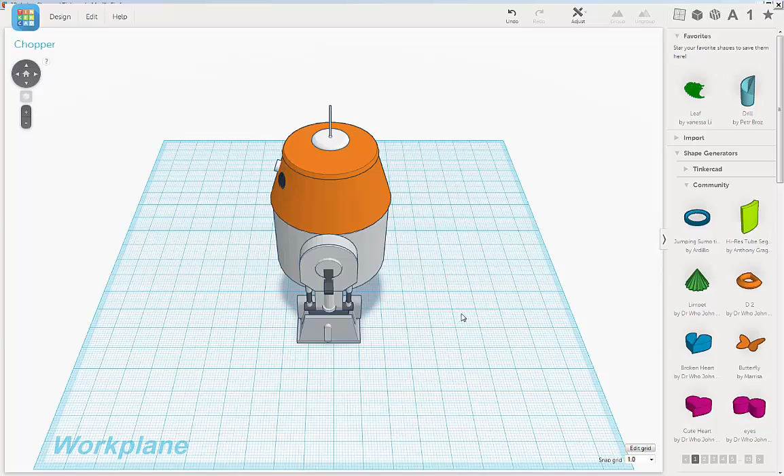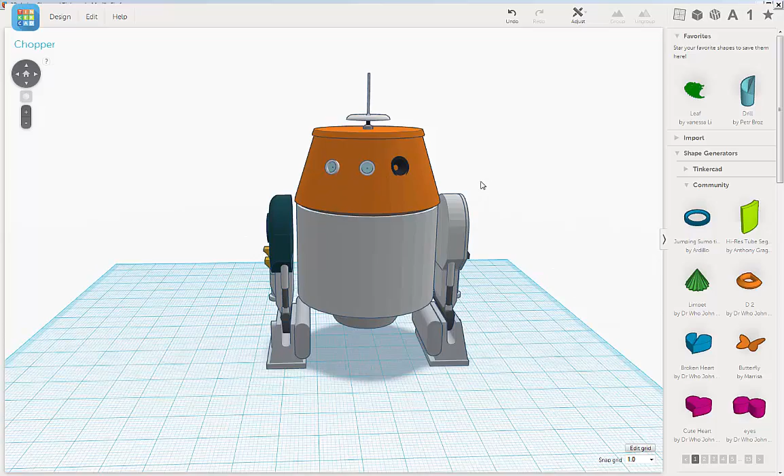Next thing we're going to do is, if you look at your reference material, he has a yellow stripe that runs around the lower part of his head. Since we can't paint colors, I'm going to do a trick to make it look like we painted on it, but we didn't. First we're going to select this top piece here, and since we haven't cut any pieces into it, it still has all these controls, which is very important. That's going to come in very handy.

So now we selected that, you're going to go to Edit, Duplicate, and we're going to slide this down. Right now it's perfectly aligned with this head, so that's very helpful. And we're going to go up to the bottom radius and type in 17.6. Then the top radius, we're going to type in 17.2.

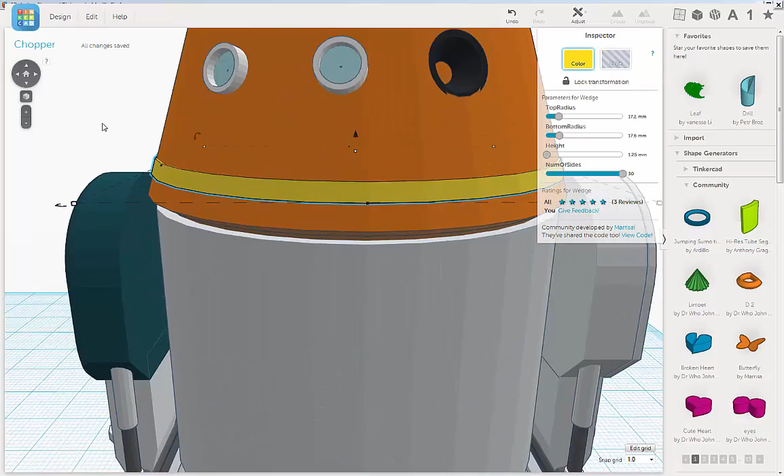Alright, now we're going to change the color to yellow. So we have a stripe. Basically all we're doing is making a piece of geometry, a cylinder, a little wider than the head so that the color pops out. It's just a little trick where we can put in detail.

Now right now it's a little short, so we're going to lengthen it. We're going to go over to height, and I want to put in 3. It's pretty good, I want to lower this just a little bit.

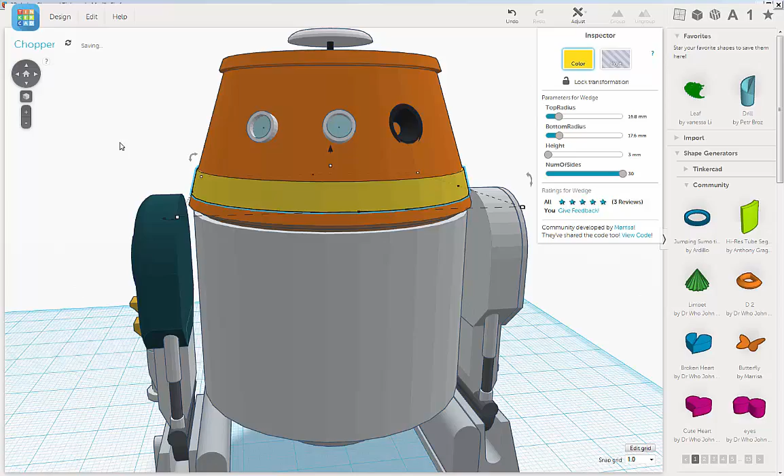Now, as you can see, because we lengthened it, this part's sticking out more, so we're going to put that in a bit. Let's type in 16.8. Oh, not bad, okay. Looks pretty good, I think it's still a little wide, so let's go to 2.5. Yeah, that looks good.

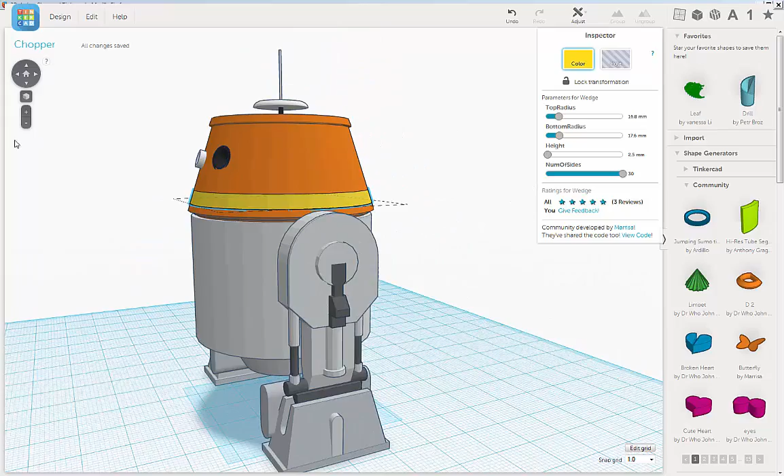So now he has this one stripe, this one yellow rectangular piece that comes up and goes up above his camera eye, it's like a square patch. So we're going to put that in, kind of basically the same way.

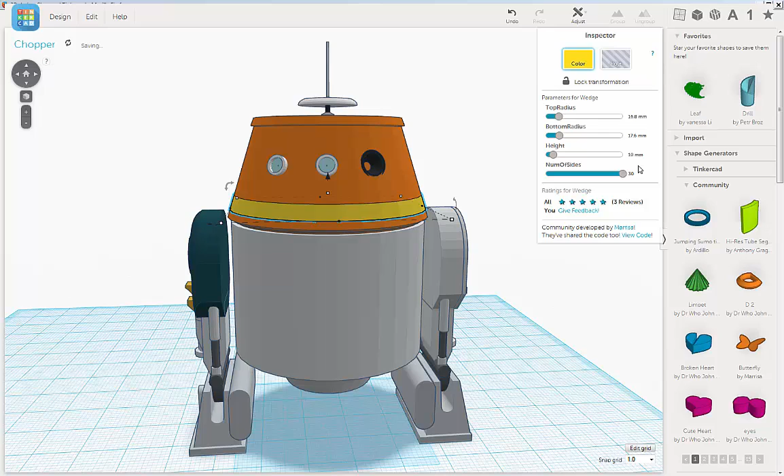So we're going to select this stripe, go to Edit, Duplicate, and we're going to raise the height. I'm going to put in 10. Okay, still not high enough, we want it to go a bit over, so let's put in 13. Alright, now let's get it to taper in.

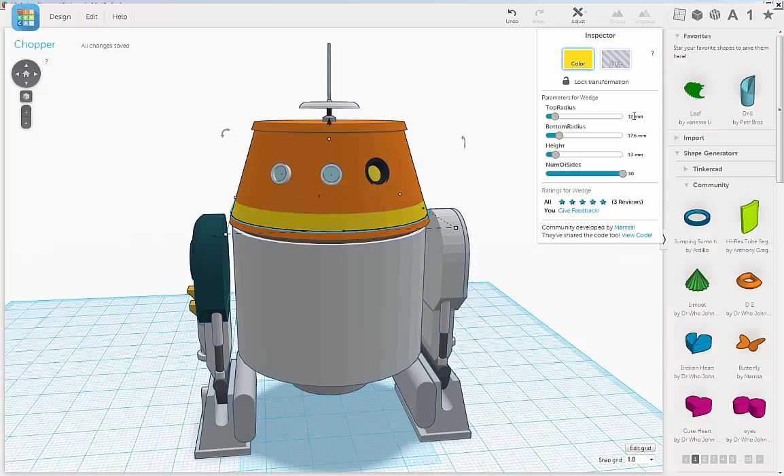Let's put in 12, see what that gets us. It's a little too much, so let's put in 15. Okay, it's a little better. Let's try 14. A little better. Let's try 13.5. A little too much, but we're really close.

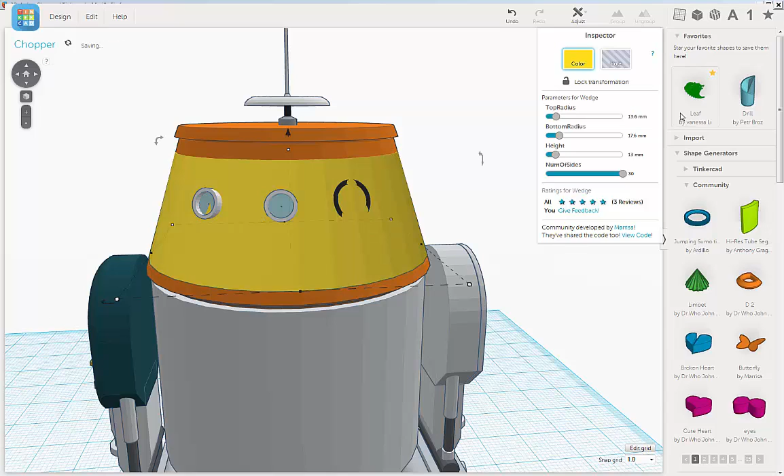So 13.8, almost, let's just put in 13.6. There we go, alright. Actually we might be able to go in a little more. So now we need to put in a couple of pieces here that we can use to cut out this shape.

First, this is just a little too high, so I'm going to slide this down just a little bit, and I'm going to increase the width. Let's go 13.8, go 9. There we go, that's better.

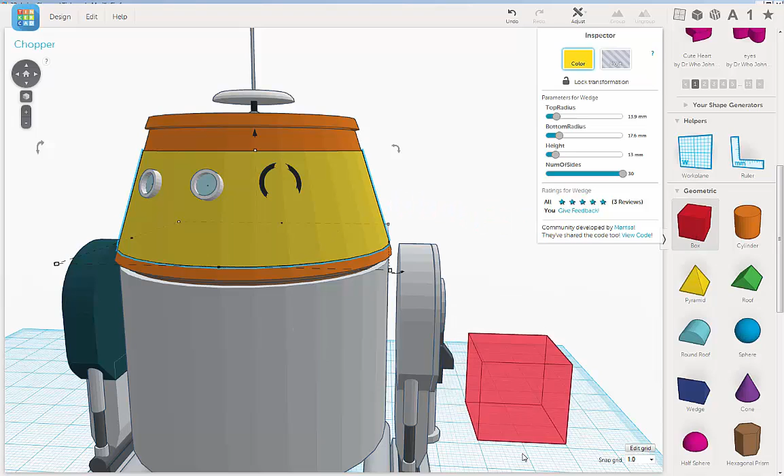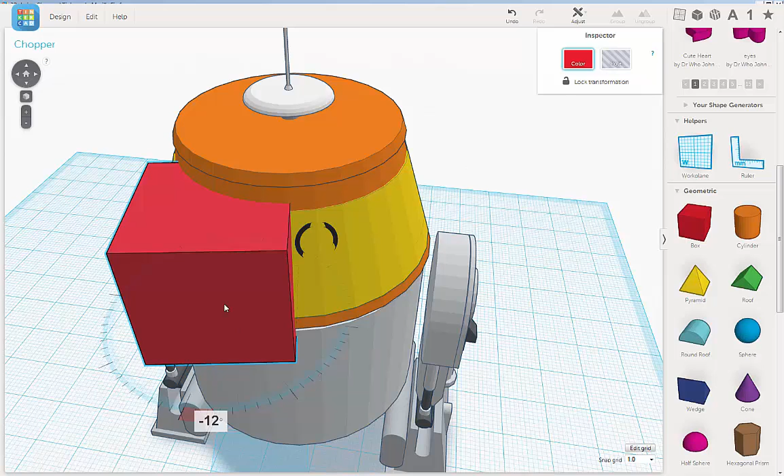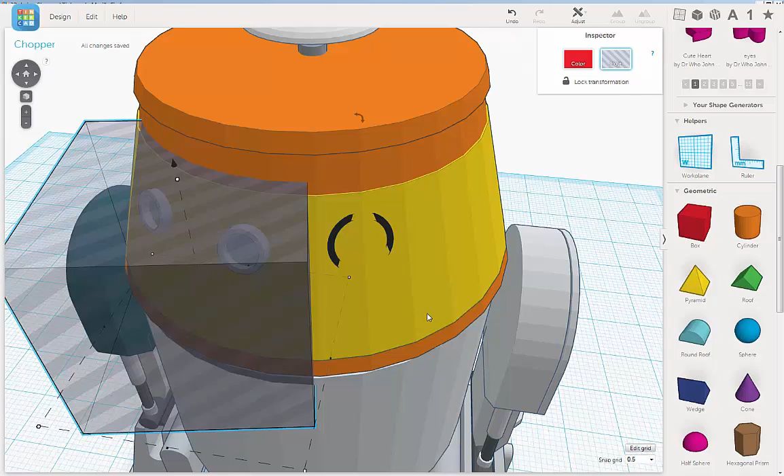Now we're going to use a cube to subtract some of the space. I'm going to use it to subtract, trying to align it with these vertical lines here. So I'm going to turn it to a hole, and try to bump it over. Let's go to 0.5 on the snap grid, and we'll just, there we go, that's what I wanted.

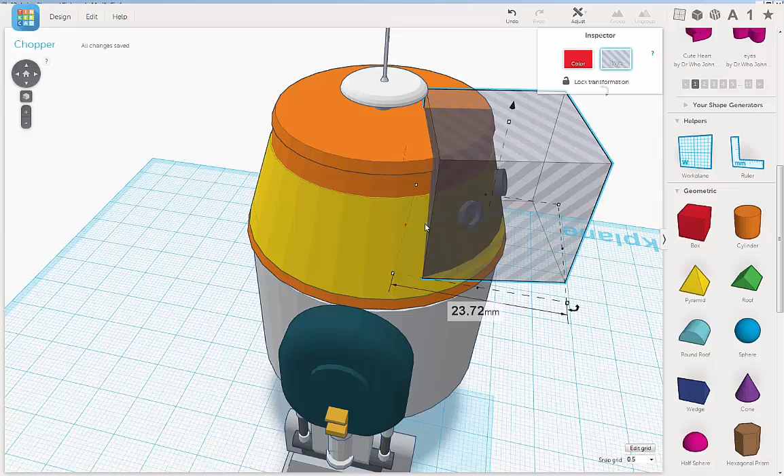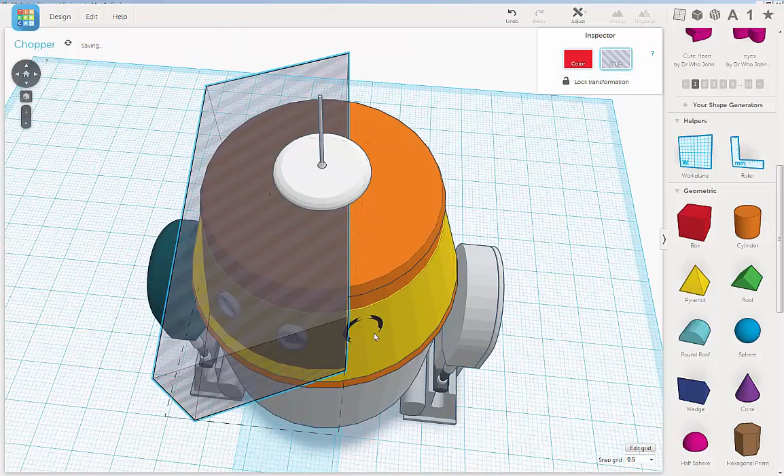So I'm going to raise the cube up, and then extend it out. Now if I extend it out, that changes the shape of it. That can be good and bad. So what I'm going to do is adjust it again, using the left arrow key. It looks about right.

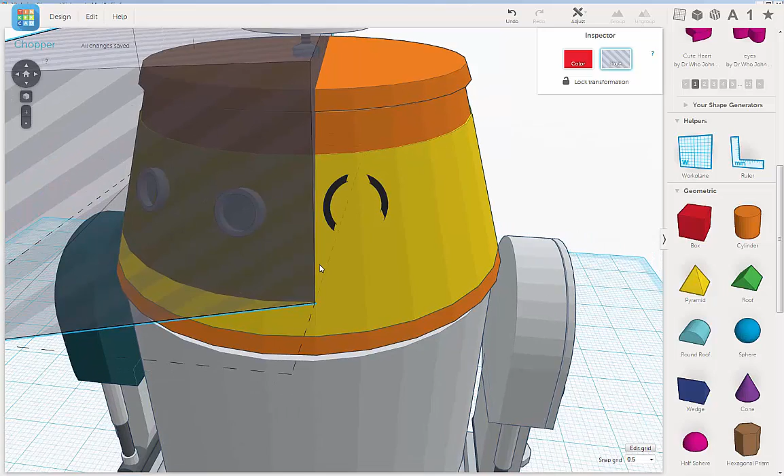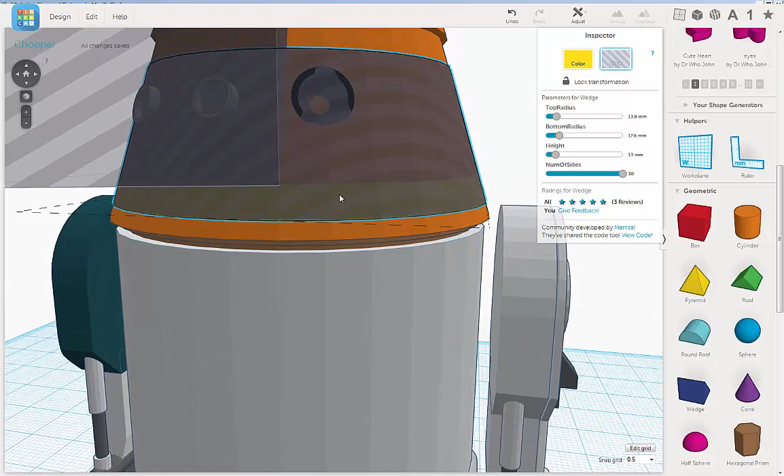Then I'm going to select this, turn this into a hole, and see where this bottom stripe is. Now I'm trying to align this to that bottom stripe, you can see it right there. Here's the line, you can make it one piece, that'll make it easier.

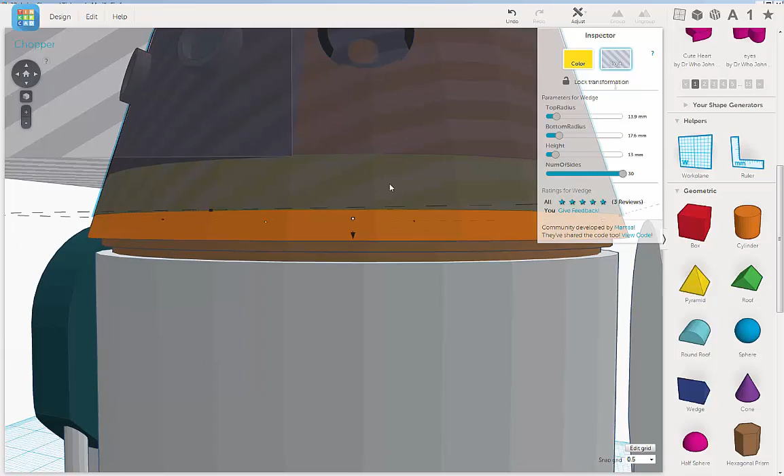So I'm going to select the cube, the whole cube, and just move it up a little bit. It's too much. Go to 0.25 on the snap. Still too much, so we'll go to 0.1. Oh, that's 1, I wanted 0.1. I was wondering why that was doing it.

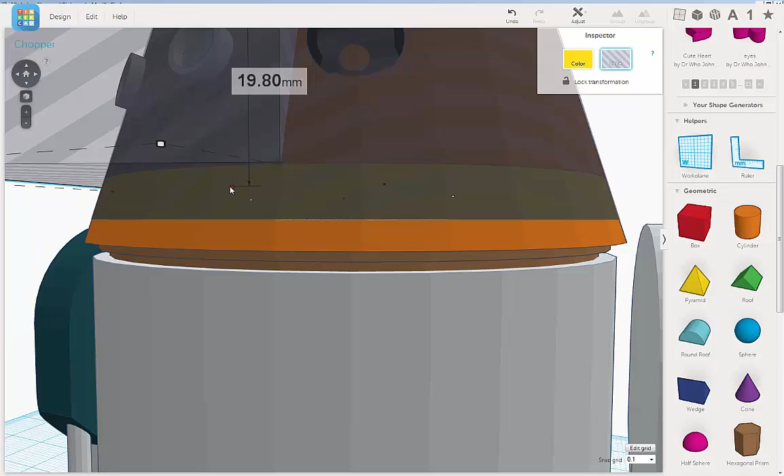We'll move it a little closer to see. There we go, perfect, okay.

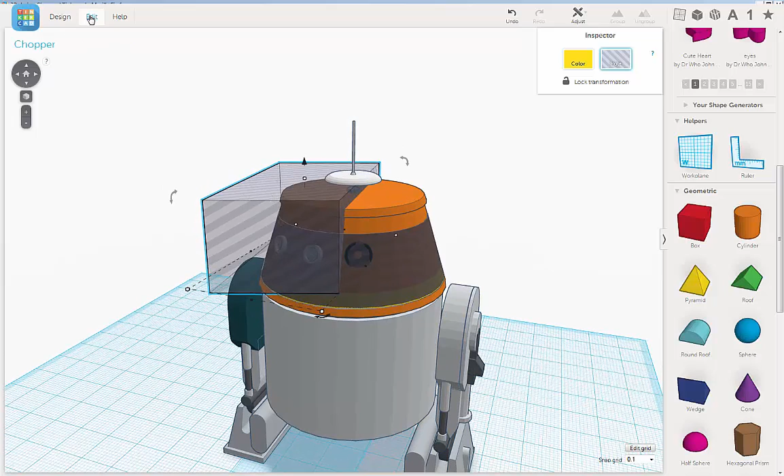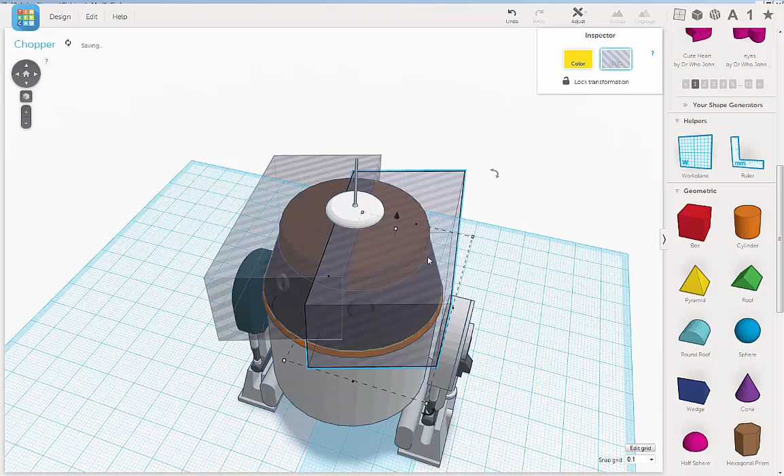Then I'm going to make a copy of this, I have it selected. Edit, Duplicate, I'm going to move it over. I want it to encompass this yellow cylinder all on this side, because we're basically cutting out this one piece. Now I'm going to move it up with the arrow key, make sure it's completely encompassing the cylinder.

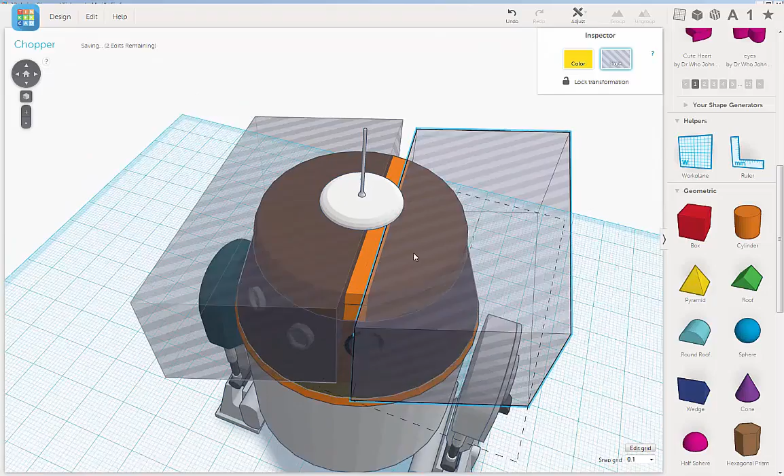Okay, now I need to rotate it, so I want to line it up with this. You can see that, it's the line where the two polygons meet, creates like a facet.

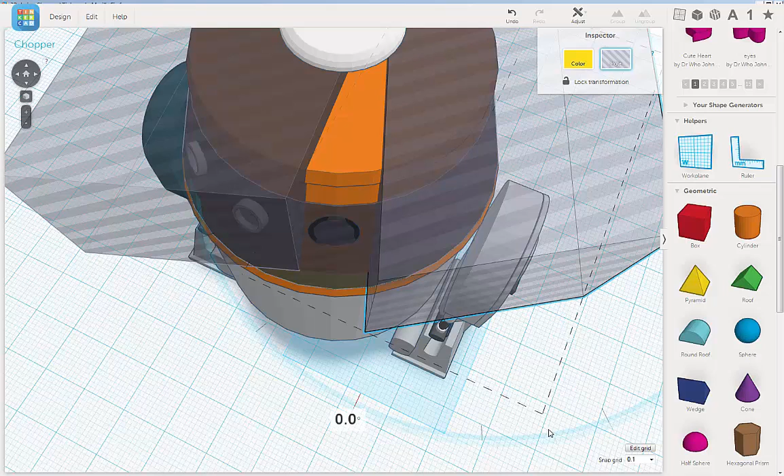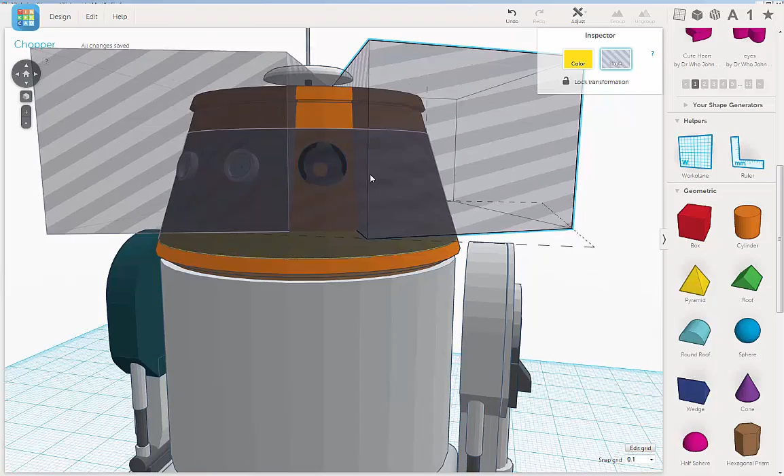That's covering everything. This piece we can take out later. So the best thing to do is just try it out, see if it works.

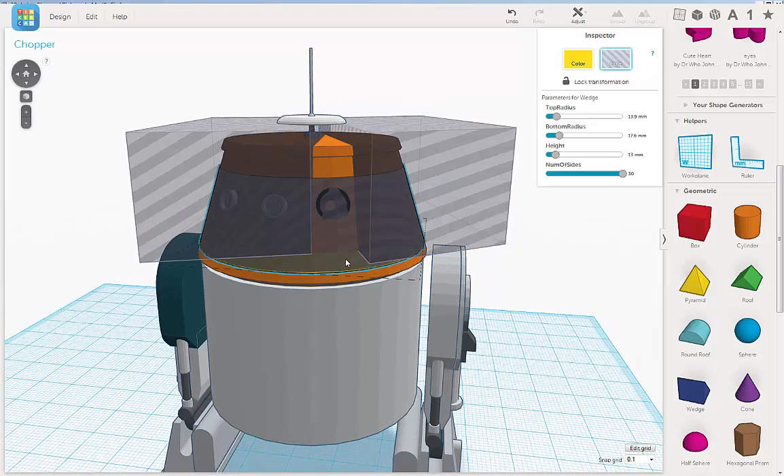So select that piece and turn it back into a solid color. Then I'm going to shift select this whole piece. I'm going to go to group. There we go.

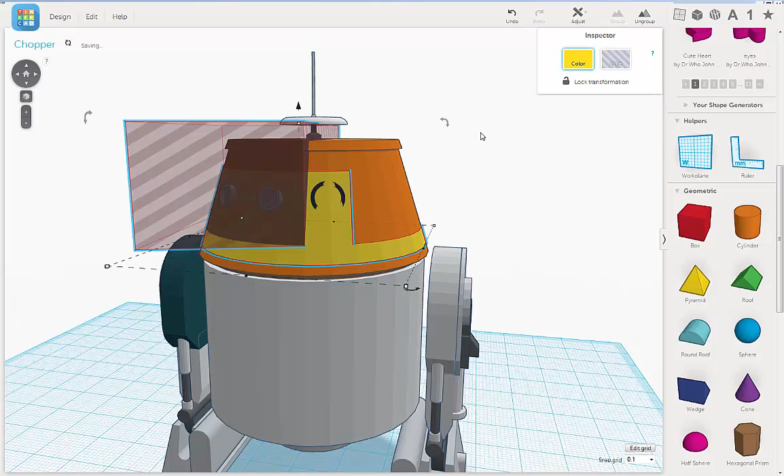I'm going to do the same thing, shift select this piece over here, click group. Okay, that looks pretty good.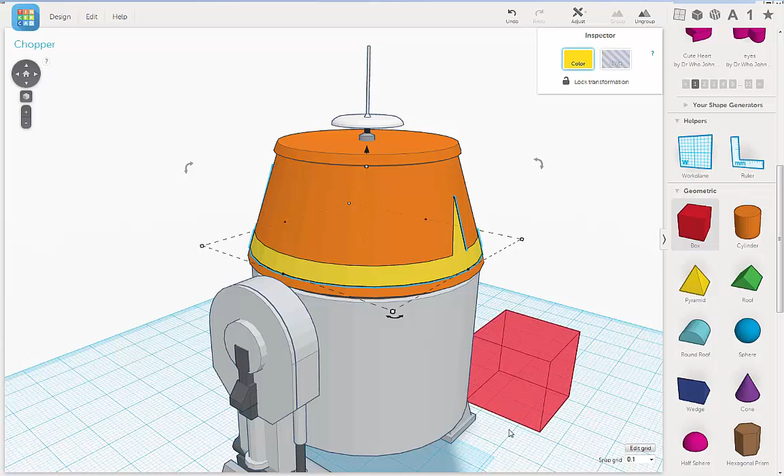Alright, and we just have to take care of this piece right here. That's part of this sometimes, when you're doing this you're experimenting. Sometimes I'm not sure what I'm going to do is work, so I have to try it, and that's how you learn. You take a chance, you experiment. A lot of times it doesn't work. That's not bad, you're just figuring out, okay, that doesn't work, so I have to do something else.

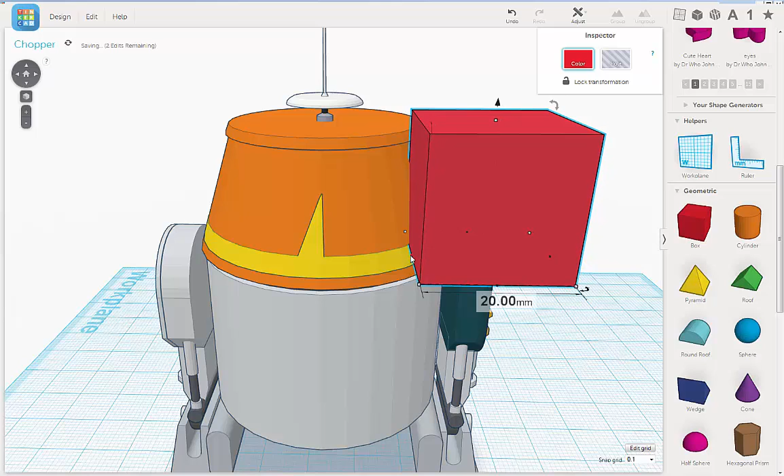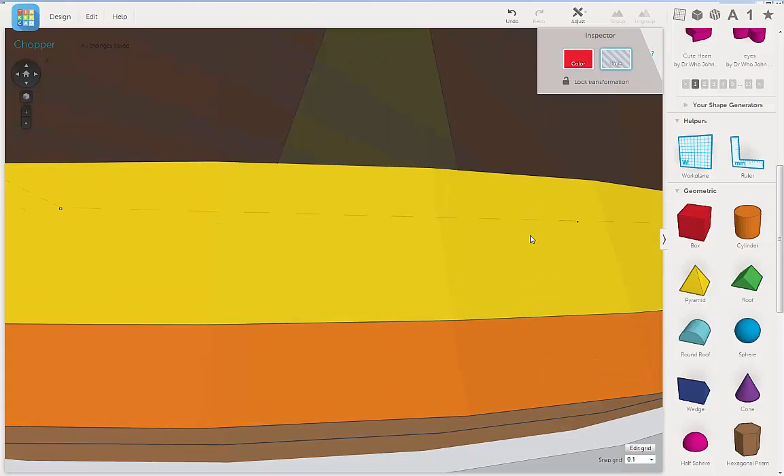And it's much easier to do it digitally, because if it doesn't work, then you just hit undo, or open up an older version. So I'm zooming in to make sure I have this lined up right. It's pretty much there. So select, shift select stripe, hole group, and there we go.